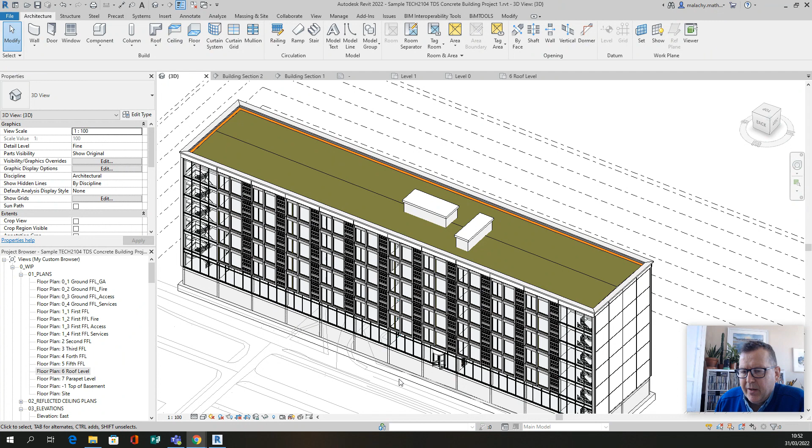Now, students, I'm going to tackle the roof on our concrete building, and I might do this in a series of 2 or 3 videos. I'll try and limit them to around 10 minutes each. Again, you don't need to follow me verbatim. You will have researched your own roof and specification yourselves, so you'll apply this to your own situation. But the techniques I'm going to show you here will be of value in creating whatever your specified roof is going to be.

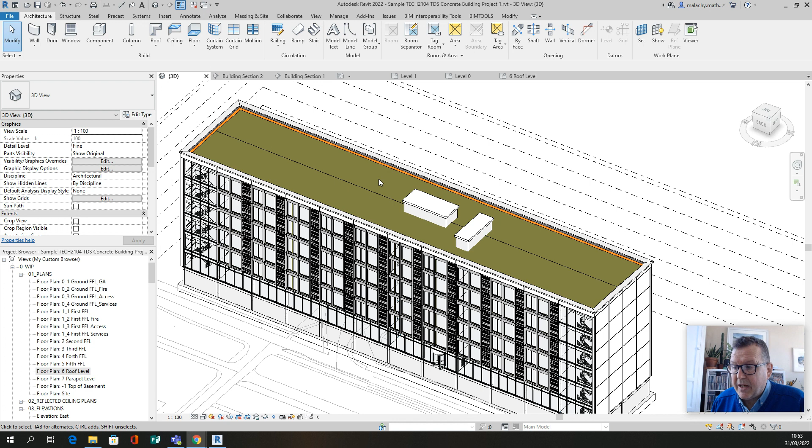Okay, so it's a green roof here, and you can see my basic outline. I've got my green roof, and the orange represents the drainage channel around the edge of the roof. If I go into building section 2, you can see my slope on the roof, my drainage channel at the side, my upstand, my insulation to the upstand, the parapet cladding on the outside, and a capping up here.

So those are the elements we're going to look at. The first one I'm going to take a look at is the upstand. My slab is a 300 slab, as all my slabs are throughout the building. Probably one of the first things you'll notice is that I've incorporated the slope in the roof into the insulation. Olivia had mentioned you might incorporate that in a screed instead - it's six of one, half a dozen of the other as far as I'm concerned. But for my technique, I'm going to create the 1:60 slope in the roof using the insulation.

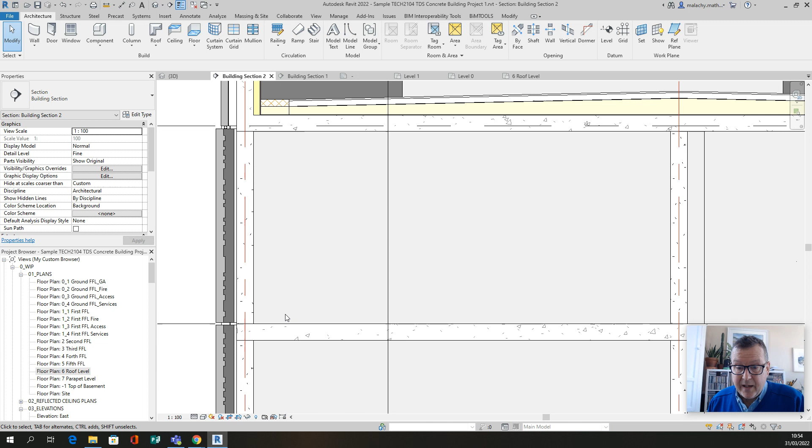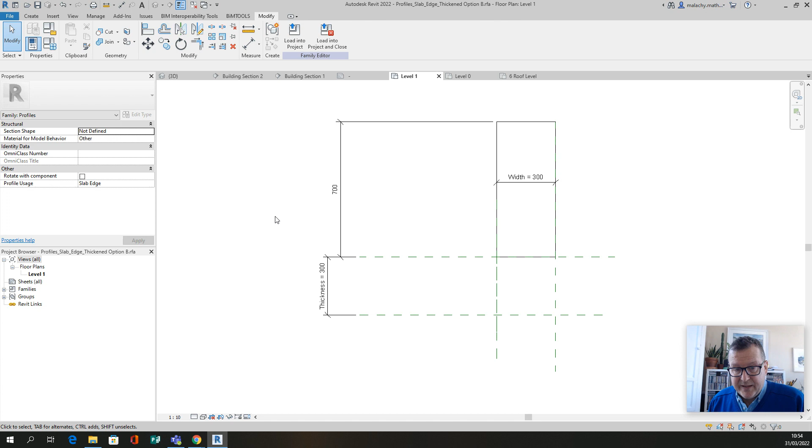Let's take a look at what's going on here. Here's my slab and here's my upstand. If you watch my other videos on creating the downstands on my slabs before, it's very similar. So what I've got here is the profile - this is the slab edge thickening option B profile. I've opened up my slab edge thickening, done a save as, this is option B, and it's very simple.

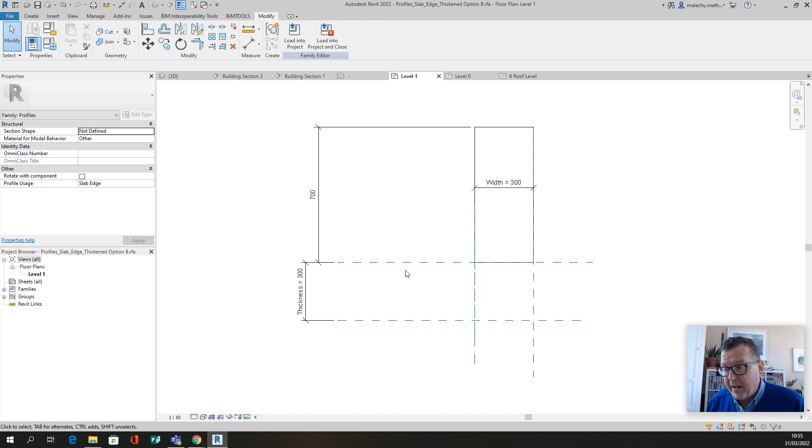A couple of things to notice: make sure you hit VV on the keyboard, go into annotation, make sure all of those are turned on in the profile view as well, so you get a view of the reference planes. These two reference planes represent the thickness of the slab that you're going to apply the profile to. Anything above this line will go upwards on the slab, anything below will go downwards. So this is a downstand and this is an upstand here.

This is a parametric dimension, so that can be changed and adjusted - it doesn't really matter, to be honest, it'll adjust to whatever slab thickness you have there, so I wouldn't be hugely worried about that one. These are just the construction lines I've drawn. I've made these at a width of 300 and a height of 700. This one is a parametric dimension, this one isn't as yet, and I could make that parametric too - you guys know how to do that easily. I know my upstand is going to be roughly 300 by 700, so I'm happy enough with that.

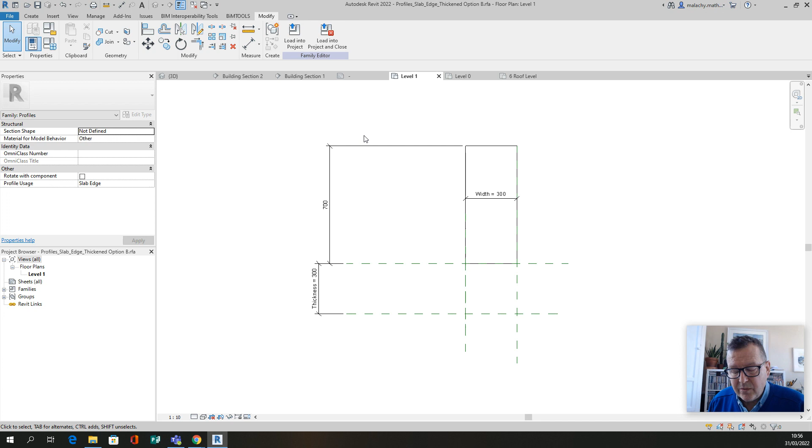Once you've created option B, you can load it into the project and close it. It'll ask you to save it into the folder where you save all your customized families. Back to building section, and then it's as simple as picking the slab - you can see there's the upstand. If you use the same material for the slab and the upstand, you'll get this automatic join happening. That's basically how that's done - very simple, and the same principle applies from the downstands to the upstands shown in my other videos. Okay, so that's that bit done.

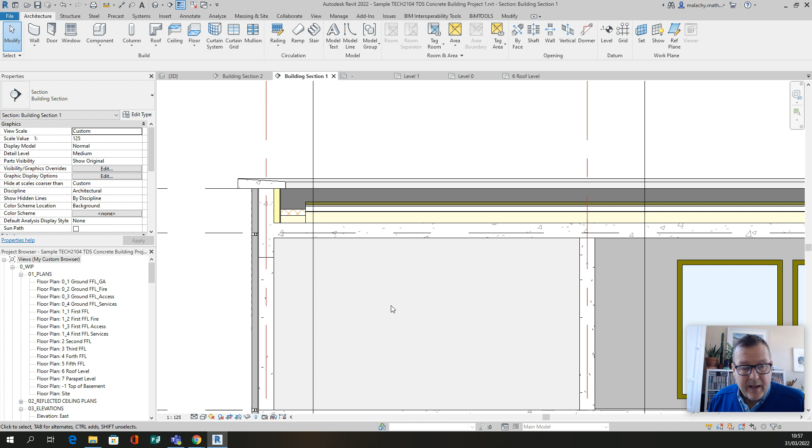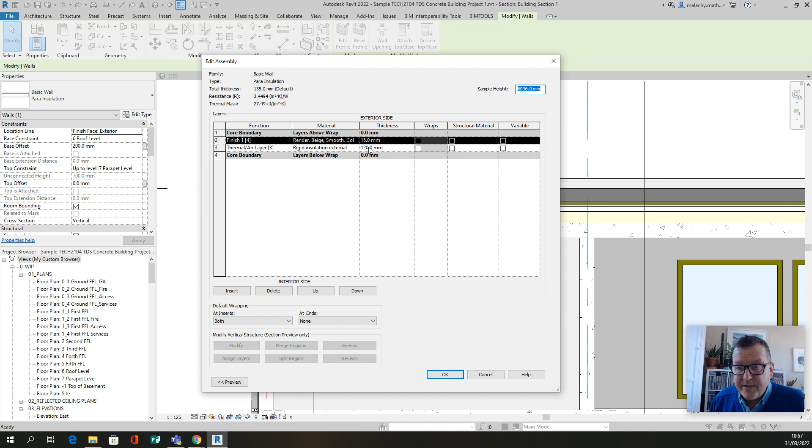Now what we've got here is the insulation to the inside of the parapet. What I've done here is create a wall - let's go in here. I just took a basic wall, duplicated it, and called it the parapet insulation. You can see I've got an external render finish to the exterior side, and rigid insulation of 120 on the inside, something along those lines.

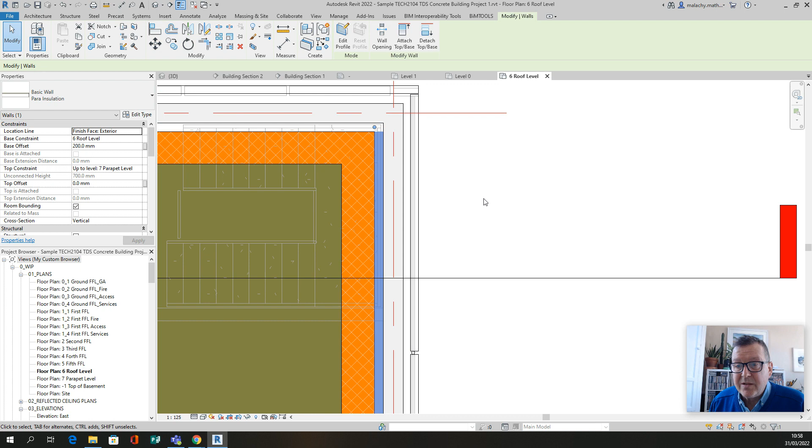Now to apply that, you go into your roof level, and I'm going to hide the parapet for the moment, and you can see here is the insulated parapet insulation wall - you literally run around and put that in adjacent to the wall, and if you miss it you can use the align tool to snap it into position. That goes the whole way around. Back to my section 2, so that's your upstand, and that is a wall that's created. Let's just check the dimensions - it goes from the roof level, I've offset it at 200 mil above that level there, look.

And it goes up to the parapet level, which is there. So roughly 700 has done the trick for me there. Now that's the parapet wall taken care of.

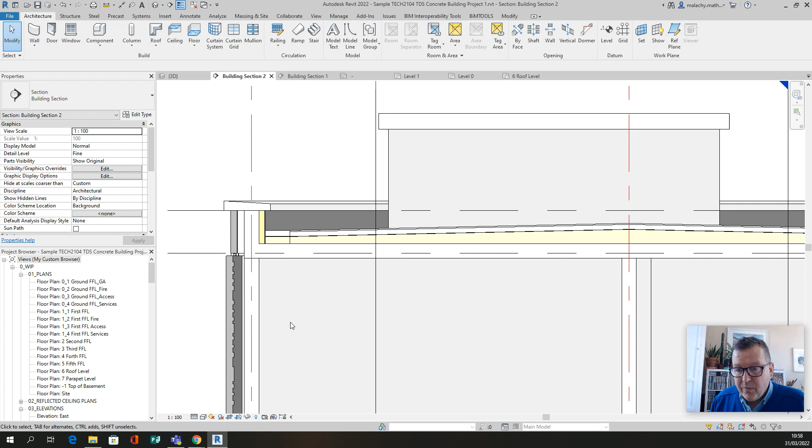Now I'm going to show you that. So that's the green roof system there. Shift that one out of the way.

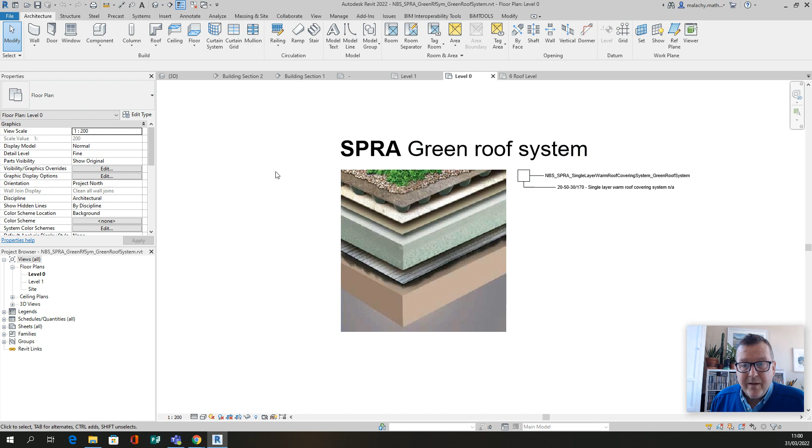So when I open that up, this is what you get. And remember this is a project as opposed to being a family. The stuff that comes from NBS and other suppliers of Revit elements and Revit families, they either come in a project or a family, so you need to distinguish between the two. So that's the green roof system I have here. If I take a little 3D of that, that's it there - it's like a big block.

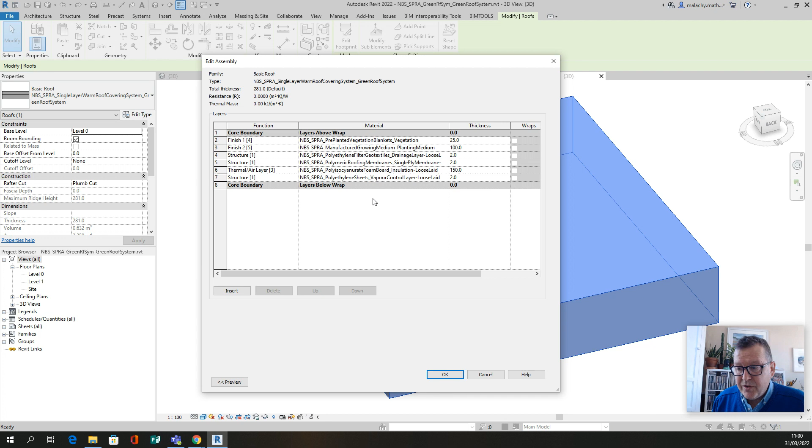But let's go into the edit type and edit structure. Now you can see you've got your various different layers there. They mightn't be exactly as you've designed it, but you can add in, delete, or change the thickness of the various different layers here as well. So it gives you that option. These are just NBS materials - once you put this into your project, those materials will come in automatically as well.

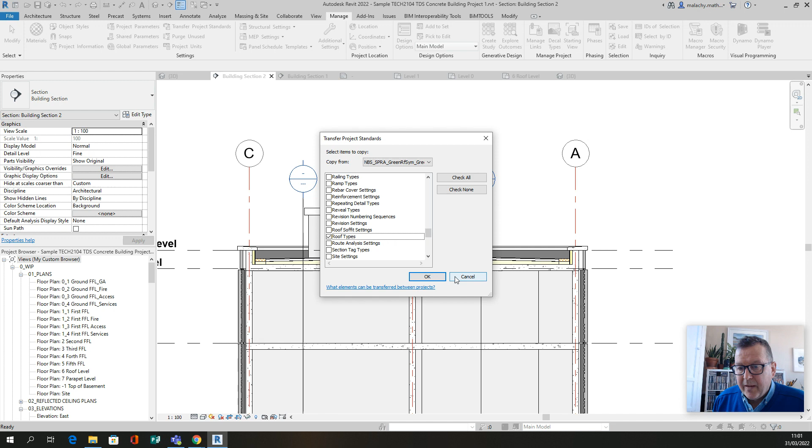So how do you get that into your project? This is how you're going to do that. You'll open up your project, go into Manage, and go into Transfer Project Standards, and you can see here's the NBS Green Roof System. Make sure your project is active, and it says copy from this project here. You can check none, then just come down to roof types, check that, and hit OK, and that will shift that roof type from the NBS project into your project here.

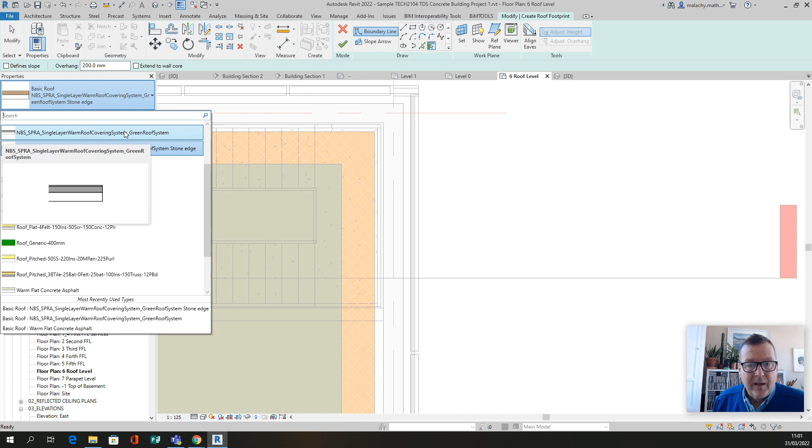So if I go into my roof level and come across into Architecture, and go Roof by Footprint and hit the drop down box here, you can see there I've got the green roof system. After that, it's just a question of applying that roof, and you've got four lovely edges to work to here. I'm just going to get in here and tab.

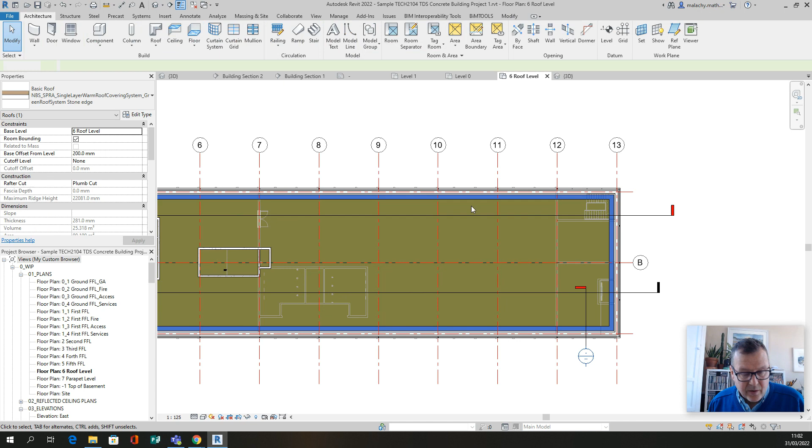That's the exterior one - I'll show you that in a second. Yeah, so that's it there. And if I edit the footprint, you can see it's a lovely rectangle.

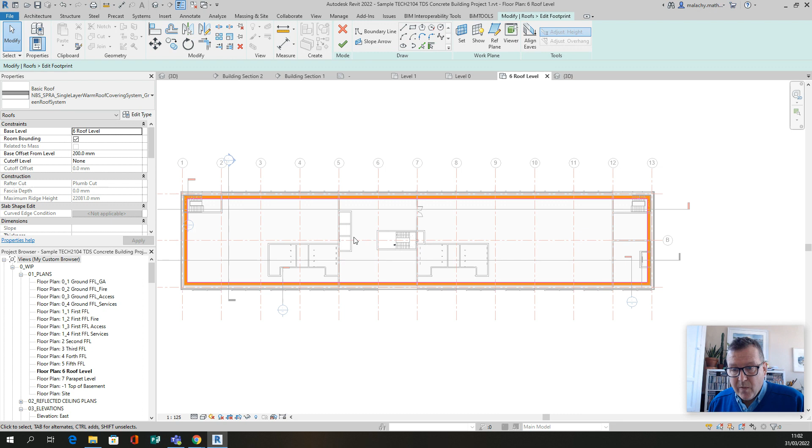Now notice for the moment what I've done is I brought the roof in through these two service areas here - these are the core stairs that come up onto the roof giving access, and these are the lift and service cores as well. So I brought those and they penetrate through the roof slab. But I brought the roof through here just for the moment, and I'll explain why in the second video. I'll just close that out.

And then if we go back to the building section here, you'll see that I've created a second roof. That's just basically it. I'll go into the roof level here - you can see it there now. That's a second roof type that I've done.

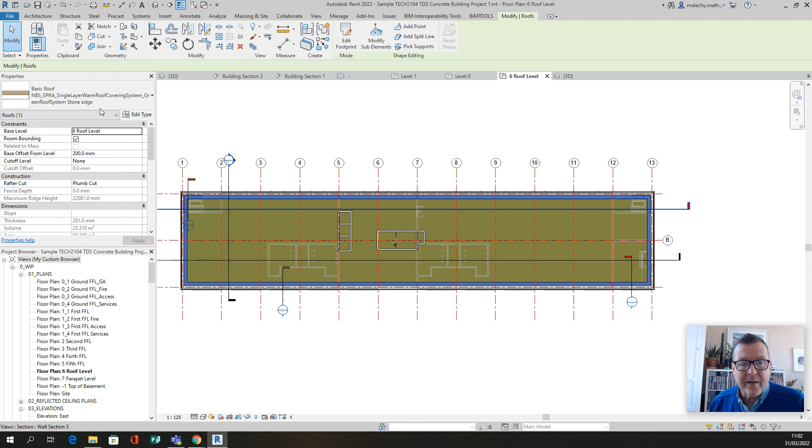And if I pick that and go into here, all I did was duplicate the NBS green roof, and I called it the stone edge. I went in here and took out the top two layers of vegetation and subsoil for the vegetation. I took those two out and replaced them with stone, and I've created a little material called roof stone drainage.

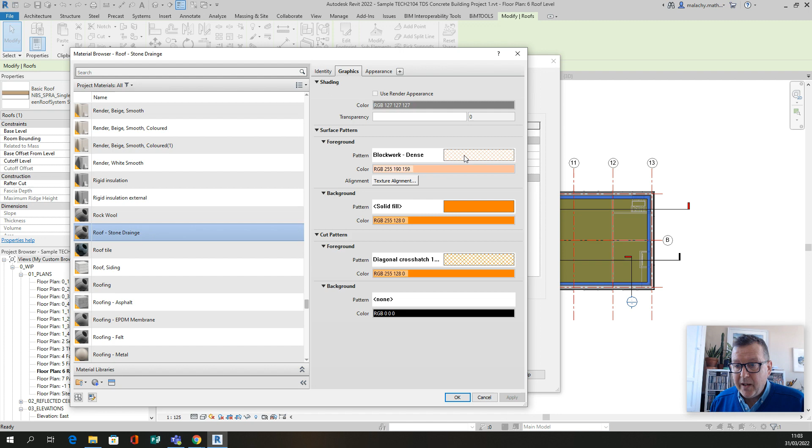So I took any one of those, duplicated it and renamed it - stone drainage. And then I've just put in a surface pattern and a cut pattern into those to make them slightly different from what's there. And then using the existing roof, I created my sketch lines and just offset them back in so that they tucked in tidily into the insulation here.

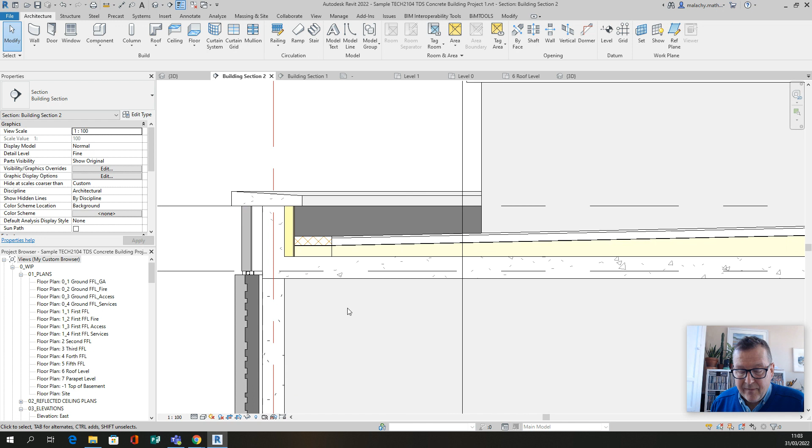Now that's good enough for this particular scale, say 1:100 or something like that. This is one of the areas that you're going to be detailing up, so we'll get into the nitty gritty in terms of the membranes and counter flashings and what we do with that little piece of plaster coming down here - we'll have to pull that back up there as well. That'll all be taken care of in the 1:20 wall section and the 1:5 or 1:10 detail you're going to do of that area.

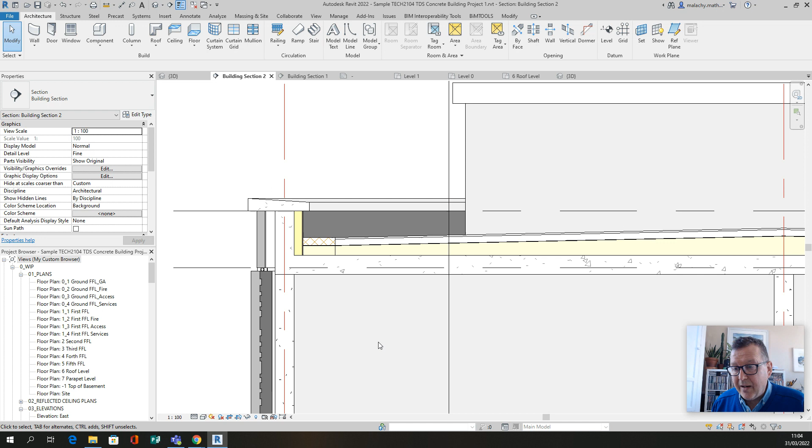Now I'm going to finish that at this point. That's part one. Come back to me in part two and I'll show you how to create the slope on the roof there.